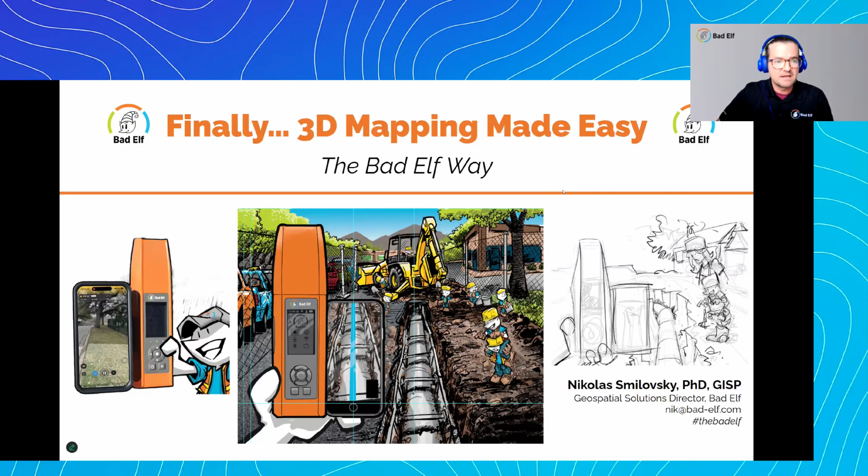So the presentation I've got today is called Finally... dot, dot, dot. 3D mapping made easy the Bad Elf way. If you've been around the geospatial gig for a while, like I have for the past 20 years, 3D mapping is not new. What we're going to be talking about today, though, is a pretty new, novel solution, one I'm pretty proud of, that really bridges the gap in so many ways. So why don't we go ahead and jump in? Before we get too much further, I do have one more set of polls.

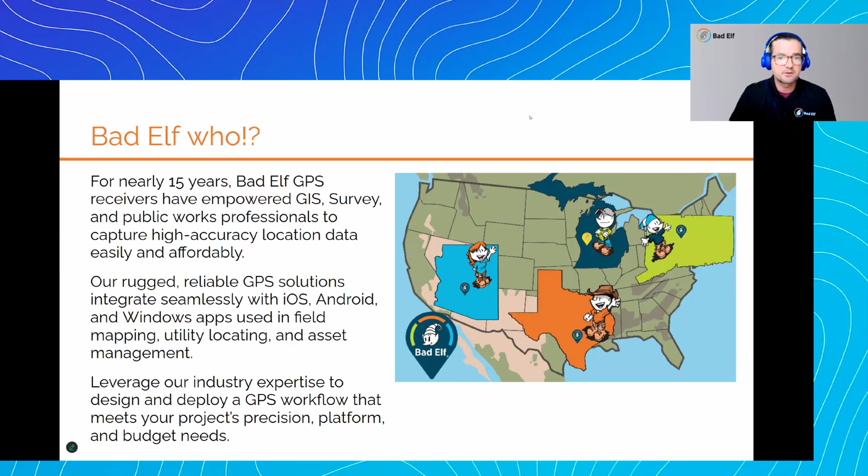So that's Bad Elf. So why does 3D mapping kind of traditionally suck?

Well, number one, it's high equipment costs. If you've ever tried to buy a laser scanner recently, or a drone or anything like that, you'll know you can spend an exorbitant amount of money, an amount that most organizations will not have a budget for. So you skip the solution because it's so expensive, or it forces you into a scenario where you're having to get a consultant to come do that work for you.

It's a really high-end technology: LiDAR, light detection and ranging, photogrammetry. These are not traditionally simple technologies, so there is a steep learning curve. It could take teams weeks, if not months, if not years, to fully integrate.

In a lot of ways, scanning in the past was slow. You would have to make these setups, and you'd kind of traverse in, hopscotching your way into your job site. That is no longer the case.

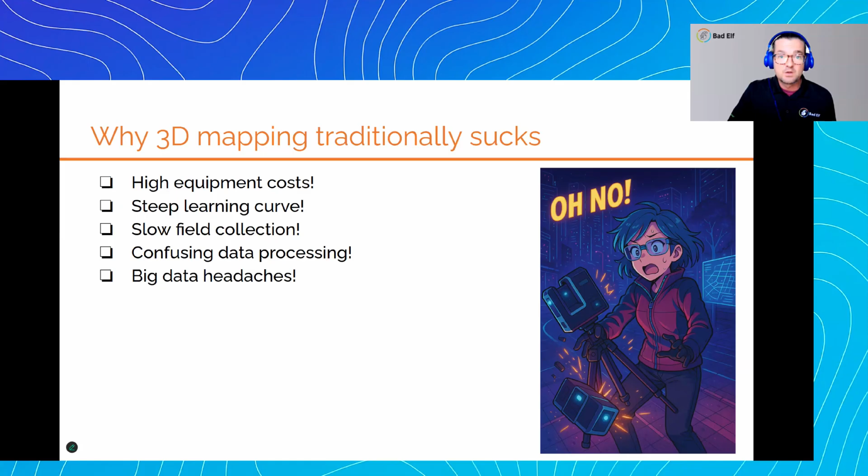Confusing data processing. If you've ever tried to process data, it could be difficult, especially when you're collecting thousands of pictures for photogrammetry, or shooting out thousands of lasers a second and creating a point cloud that's gigabytes in size. Those gigabyte-sized data sets, this big data, inherently has its own set of headaches. So that was traditionally something that could dissuade people from wanting to do 3D mapping.

And integration. How did you get that data that you just collected into your CAD or GIS system? And how do these things all line up? How do you get those dots and lines on your map to be in the right place?

Add all of those kind of traditional issues with 3D mapping, plus all the normal issues, like weather. We were just chuckling about how hot it is across the country right now. I don't know about you, but I don't like scanning in 115-degree weather with humidity.

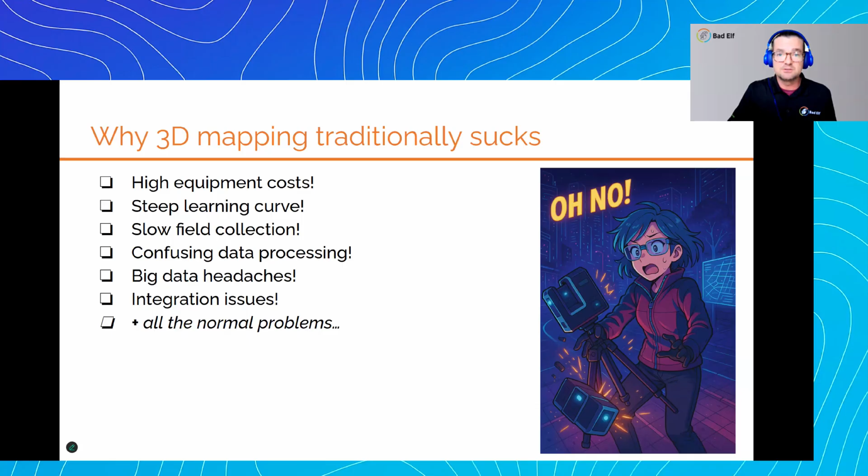So you add in all these traditional, quote unquote super professional term here, sucky aspects of 3D mapping plus normal stuff, and a lot of people would not get into the industry. I'm here, and I think you'll see through Tom and Tim's presentations, we are here to convince you that the time is now to implement a new solution.

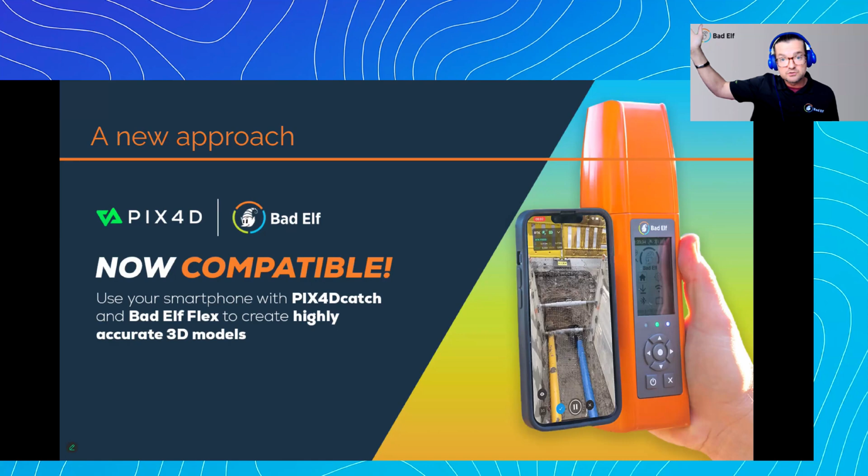That new solution is literally Pix4D and Bad Elf. Both companies have been around for quite some time. Bad Elf is an affordable, accurate, and versatile BYOD GNSS. And most of you would know that Pix4D is the world's renowned photogrammetry point cloud software for both UAV traditionally and terrestrial scanning.

The approach that you're going to see today with Pix4D Catch and Bad Elf is what we call the BYOD approach, the bring your own device. What is your own device? It's the cell phone in your pocket, the tablet in your backpack.

So with your iPhone, with LTE or cell phone connectivity, with a Bad Elf GPS, with the Bad Elf Flex, with an RTK network—that's a real-time kinematic network, a corrections network that provides high accuracy to your GPS—the Bad Elf, and that high accuracy is passed to the Pix4D Catch app on your iPhone or iPad.

So I mentioned earlier, I was going to talk quickly about POB or bust, this idea that all geospatial projects need to have a strong geodetic background. So let's talk about this.

Traditionally, in the world of surveying, there's a concept called point of beginning, or POB. This is like the rug that ties the room together. In ancient Rome, there was literally a monument in Rome, and all maps led back to that monument. That was a cornerstone or point of beginning for the entire Roman mapping architecture of the Roman world.

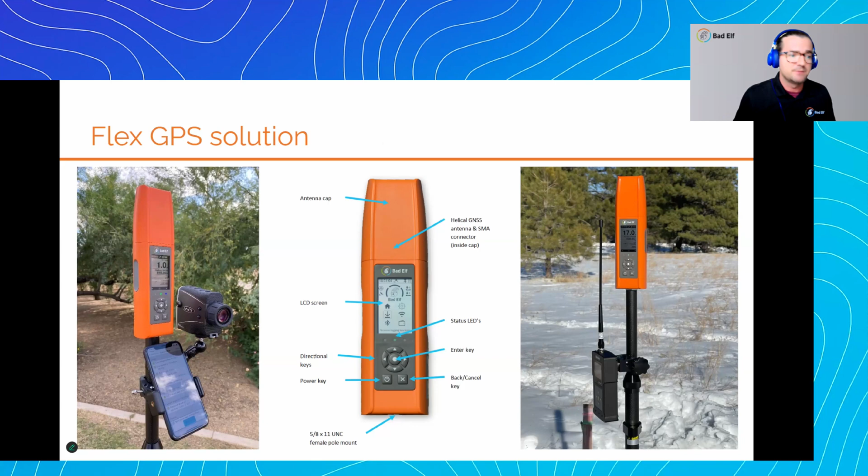We can do base and rover. You can connect peripheral devices like laser range finders, you name it. We've also got the Bad Elf Flex Mini, a smaller device, a near survey grade device. So depending on your needs, if you need something bigger, a little bit more reliable and accurate, you can go down that road, or perhaps something a little more affordable, versatile, and easy to carry.

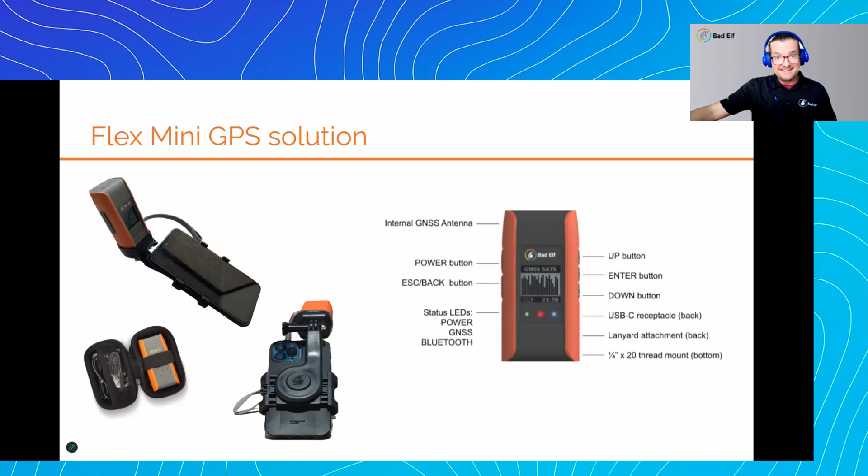Okay, so Bad Elf, as I mentioned, we create the GPS that ties the room together. Our GPS augments with the Pix4D scanning on your phone or tablet, and then we provide high accuracy.

Okay, so let's take a few minutes. I'm going to watch this video with you all now on ADA compliance. If you've ever been around GIS, Americans with Disabilities Act and ADA transition plans have been something pretty big in the state and local government space for the last 10, 15 years. So let's learn, or see at least, how Bad Elf plus Pix4D can be applied to an ADA compliance project. Here we go.

Hi everybody, thanks for joining today. I'm Chris the Bad Elf, and I'm here at UTSA in San Antonio, where I'll be conducting an ADA survey using Pix4D Catch and the Bad Elf Flex. We'll be collecting ramps, crosswalks, and other ADA assets, so stick around if you'd like to see all the tips and tricks that go into collecting a quality 3D scan.

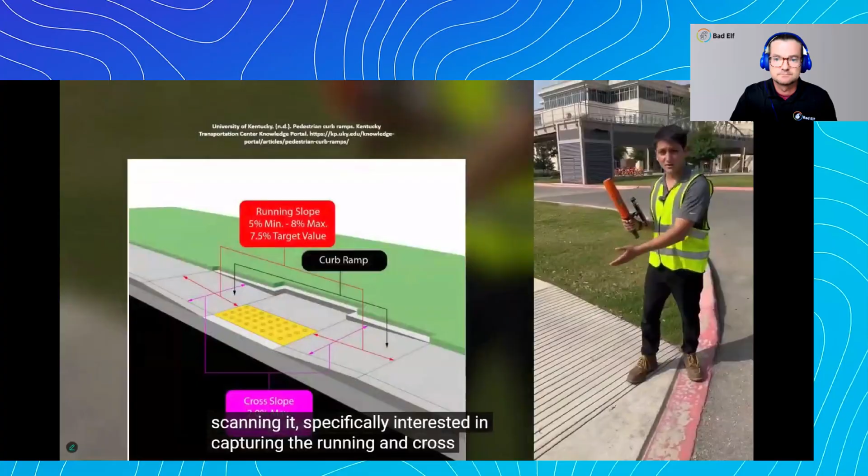We're here at one of the ADA ramps we'll be collecting today. Whenever we're scanning it, we're specifically interested in capturing the running and cross slope so that whenever we generate that point cloud and get back to the office, we can go ahead and take those slope measurements in an accurate, precise, and repeatable manner. So how do we get started using the solution?

First, you want to make sure you're paired with Bluetooth, and then you're going to open up the Pix4D Catch application and engage RTK correction. So to do that, I'm going to go here to the top left, click these little three dots, and hit RTK via Bluetooth. From there, it's going to recognize the Flex, it's going to recognize my GeoNet credentials, and then I'll go ahead and hit connect.

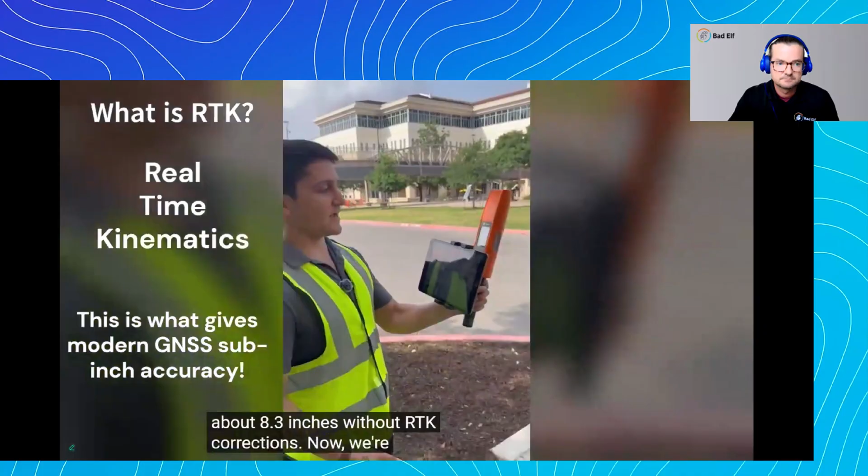So right now we're at about 8.3 inches without RTK corrections. Now we're engaging it, and if you see there, I'm actually getting 0.8 inches of GPS accuracy for my scan. And now I'm going to go ahead and walk this ramp, crosswalk, and other ramp.

And I think that wraps up our final scan. So assuming we got everything, let's go ahead and pack up, get to the office, and see how the data came out. We're back in the office, and it's time to start analyzing the point clouds that we created while doing our 3D scans of the ADA ramps at UTSA.

To get started with putting this point cloud to work for us inside of GIS, we'll begin by adding annotations. If I click my line, you'll see that I can create cross slope measurements and running slope measurements with a couple clicks of the mouse. From there, I can generate elevation profiles, signify my slope as a percentage, and export to GIS in the form of a shapefile or CAD as a non-proprietary DXF.

All right everybody, we're in ArcGIS Pro now, and the first thing we're going to do is bring in the shapefiles that we exported from Pix4D Cloud. To do that, I'm going to add a folder connection by right-clicking on Folders within the catalog pane. From there, I'm going to navigate to the folder that has my data. Hit OK. Now that I have that folder connection, go ahead and open it up. Select my layer, which is UTSA ramp slopes. Right click it, hit add to new, and create a new map.

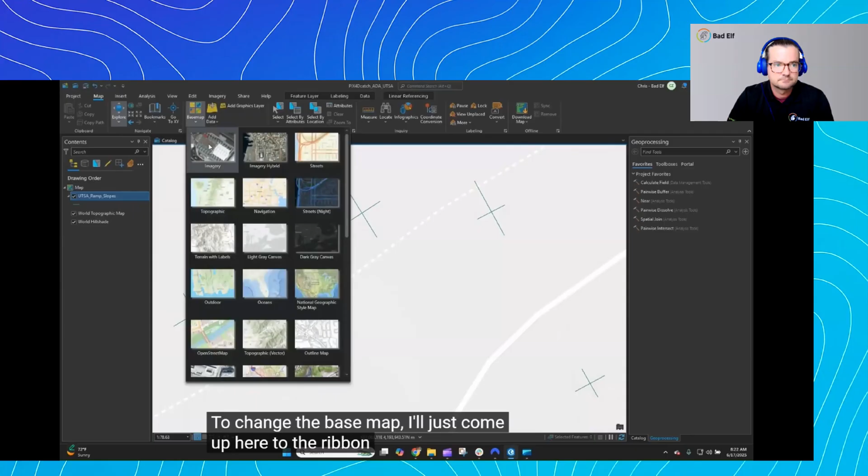Now this is going to come in the default base map, so we're going to go ahead and change it to an imagery hybrid to give us the most situational awareness of the campus. To change the base map, I'll just come up here to the ribbon and change my base map to imagery.

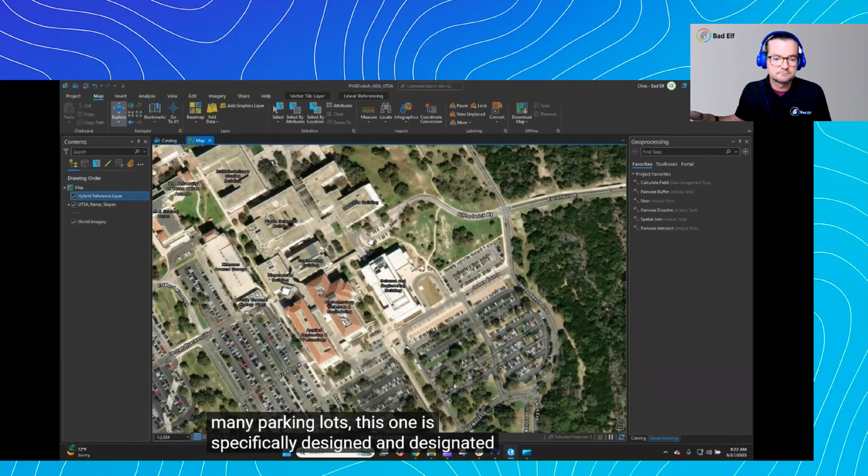One thing we can note right away is that we collected this data in a very special location. If we look closely, we can tell that while UTSA has many parking lots, this one is specifically designed and designated for ADA access to the campus.

To ensure ADA compliance for these ramps, we'll need to take a look at the slope of each line. The quickest way to do this with a data set this small is just to look through the attribute table. Here we'll see that each of our lines has a slope associated with it. For running slope, we're looking for values under 8%, and for cross slope, we're looking for values under 2%.

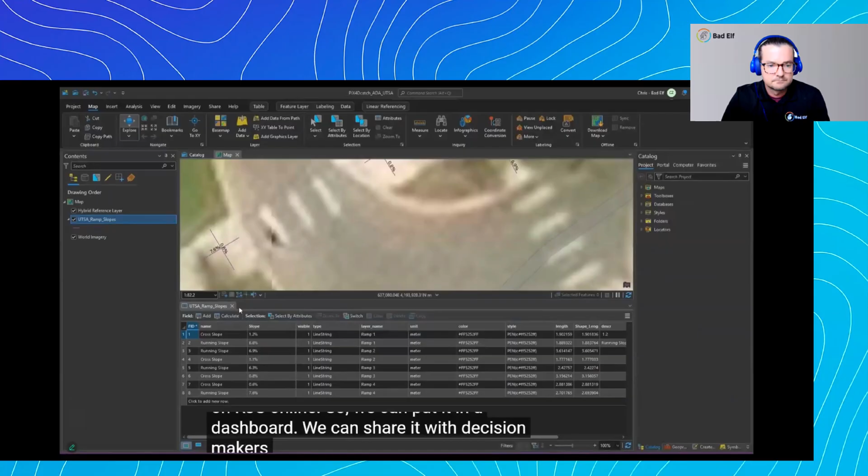So we verified that everything is in compliance, and now we can share the data on ArcGIS Online, so we can put it in a dashboard, share it with decision makers or other departments. First, I'm going to right-click the feature layer, go to sharing, and share as a web layer. This pipes it directly into ArcGIS Online in my organization's geodatabase. Now we just hit Analyze, then Publish, and share as a web layer. Now anyone within the organization can view this data and make actionable insights.

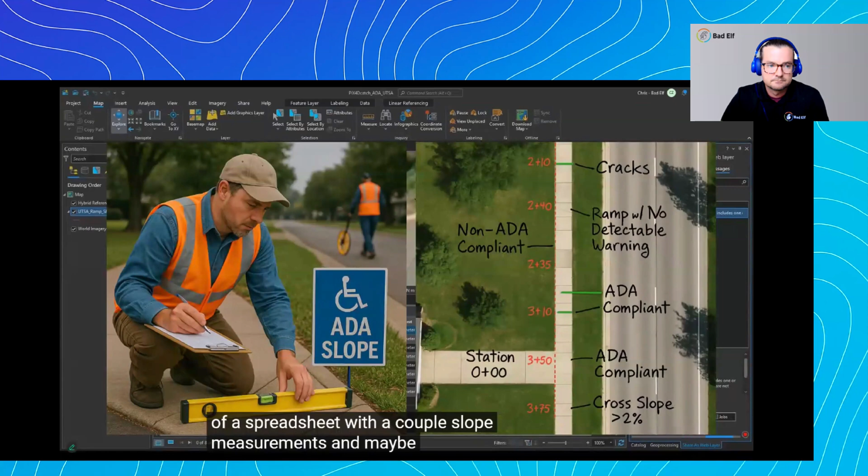If you've done ADA compliance work for a while, you're probably familiar with the typical process. Oftentimes, this data comes in the form of a spreadsheet with a couple slope measurements and maybe some coordinates, or other times it's only a marked up aerial photo with stationing. Converting that into reliable GIS data takes time, and the accuracy is not always guaranteed.

For this project at UTSA, we used Pix4D Catch and the Bad Elf Flex to capture geo-referenced 3D data right in the field. It's accurate, tied to the state plane coordinate system we chose, and it's ready to publish in ArcGIS Online with minimal post-processing. At the end of the day, it's just a faster and more reliable way to document and share these ADA site conditions. That concludes today's video on how Pix4D Catch and the Bad Elf Flex are used.

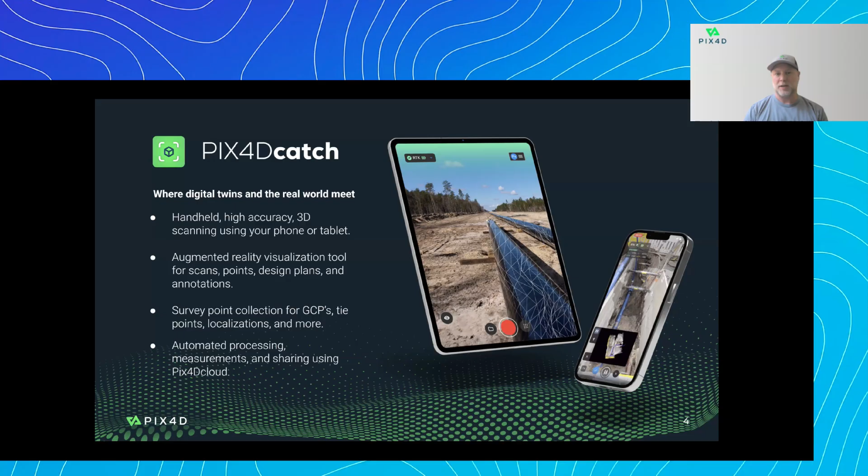So like I said, Pix4D Catch is the mobile app. That's the data capture portion of the app. We have our Pix4D Cloud, which is our cloud processing and analysis and sharing tool, and Pix4D Matic, which is our desktop processing and analysis tool as well.

One thing I wanted to mention here: Nick showed that ADA video, and he was showing the lines and the measurements in ArcGIS, which is really cool. But through our software, we can process the data, we can analyze the data, but we can also export all that data into whatever generic format you're looking for, whether it's going to CAD or GIS.

So in ArcGIS, we can export the mesh models as SLPK, scene layer packages, and those are drag and drop of a 3D mesh directly into ArcGIS, into an ArcGIS scene. So it's a really cool way to be able to visualize some of this data in ArcGIS.

So let's talk about the technology here a little bit. We're using a technology called photogrammetry. This is nothing new, it's been around for a very long time. It's the science of taking accurate measurements from physical objects from photos. So take photos and measure from those photos.

This technology dates all the way back to Da Vinci. He was one of the first people to theorize that this was possible and to start to work it out. Practical techniques were developed by French scientists and geodesists in the 1830s, so we're going back 200 years now. As surveyors, we started using it in the 1910s with the USGS aerial surveys. It was used heavily in World War I.

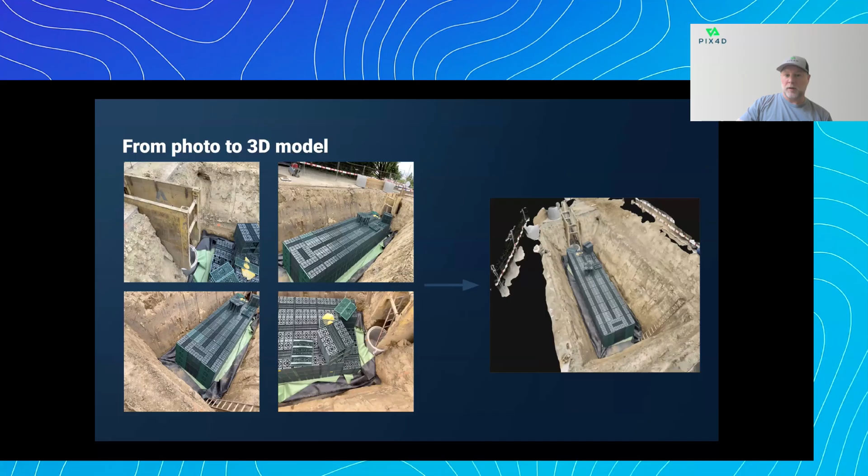So photogrammetry works with just about any type of camera. As long as we know the parameters of that camera, such as the focal length and the sensor sizes and things like that, we can turn pixels into points.

But now we have these cameras in our pockets every day. We're all walking around with these cameras, and they're really good cameras. I really want to stress that, these cameras are really high quality. 8, 12 megapixel cameras, and of course they can go higher than that, but Apple limits us a little bit on that, and you don't really want a 65 meg photo to be processing either. But these cameras are really good.

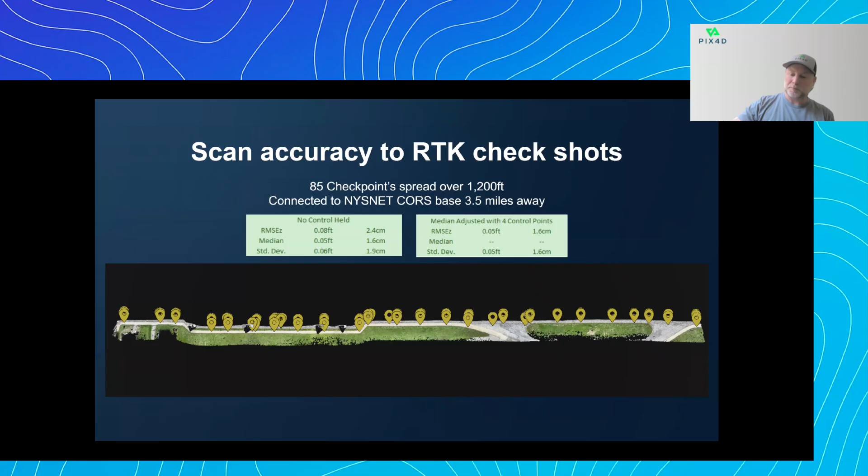And I get challenged a lot. I think this is pretty amazing, again, from a cell phone. I get challenged a fair amount on why the vertical accuracy is better than the horizontal accuracy, because in standard GNSS, GPS work, it's usually flip-flopped the other way. Horizontal is a little bit more accurate than the vertical.

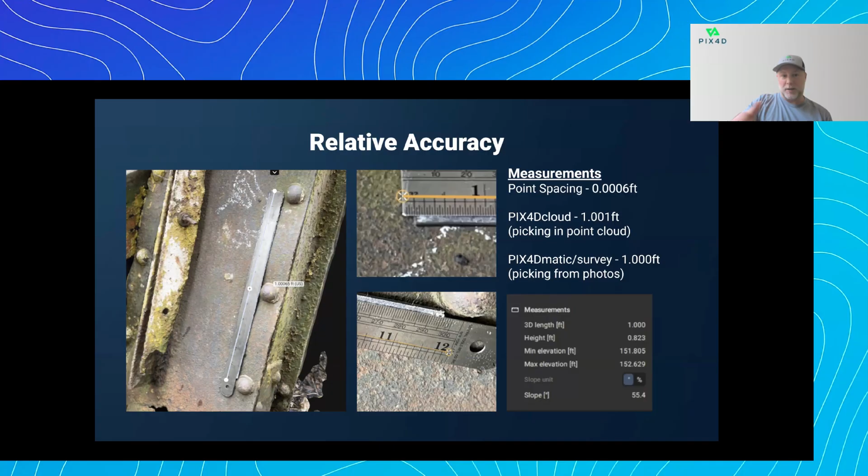These are just show-off slides here. These are actually mesh models from that scan, not photographs. You can measure rust flakes in millimeters on these if you wanted.

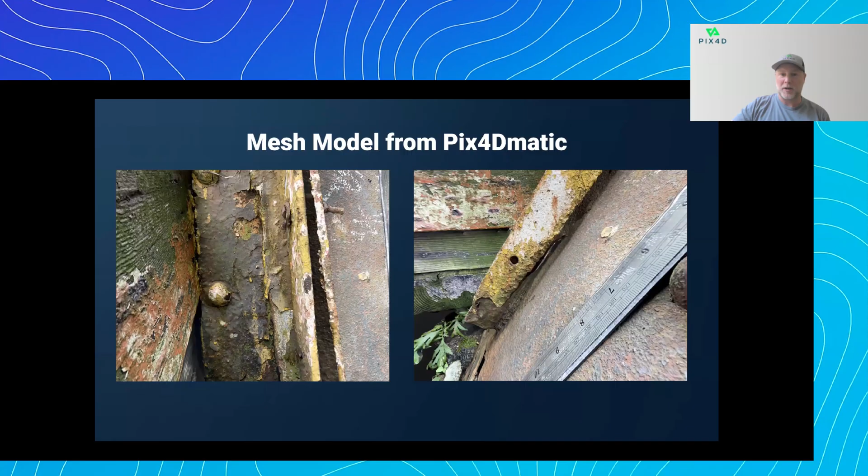Just another quick relative accuracy one here of some anchor bolts. And again, another, but these are mesh models. You can see the grain in that wood. You can count the threads on those bolts if you want. In fact, we actually did some of that with Tim on some gas valves when we were doing some demonstrations with him maybe a year or so ago, which worked out pretty well.

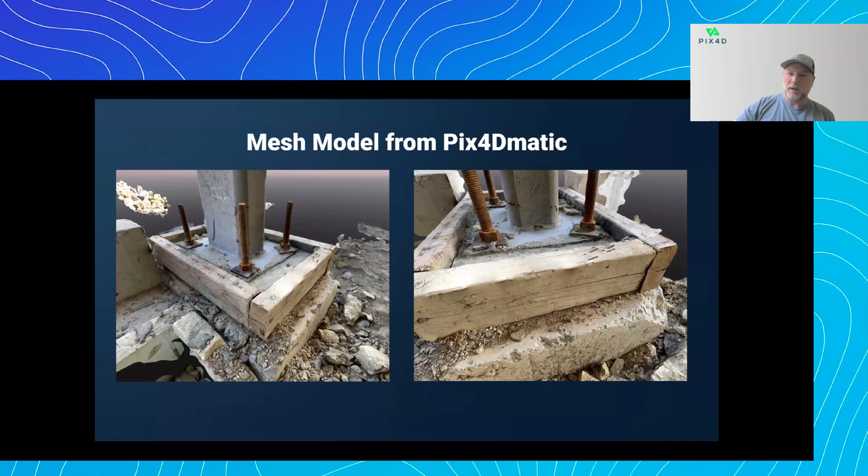Augmented reality accuracy. So over on the right, I have a rebar, some property corners I found out there. There's some challenges to measuring the accuracy of augmented reality. One, it's constantly updating as you're moving around, so it does move around a little bit. It's a virtual visual representation on the screen that you're looking at, so there's some interpretation open to it.

It does improve over time. Objects closer are more accurate than objects further away. And traditional GNSS, RTK things, doesn't work under bridges, right? Let's factor in on this.

So I did an experiment. I went out, I made these targets with rings on them, at 1/10 intervals. Did some RTK observations on those, loaded them into Pix4D Catch, and then went out and viewed those in augmented reality to see how close they got. Here we go, let's see if the video plays.

So my observations on this are that all the targets I tested got within 0.2 of a foot, about 6 centimeters, within seconds of arriving on the point. They got a little bit better when I stayed on that point and watched it for a while, got down to that 10th range or 15 hundredths range. Once it was locked, it usually stayed as long as I kept walking around it and looking at it. It stayed pretty tight, but I did find a couple little outliers here and there.

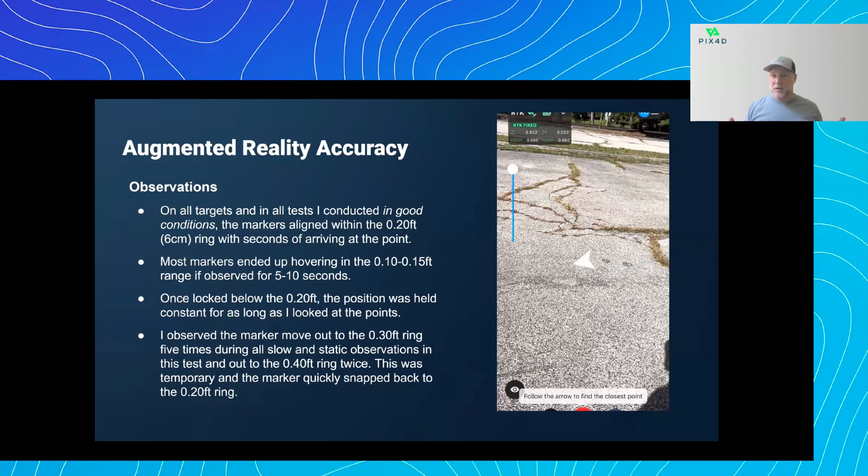So in general, when people say, what's the accuracy of the augmented reality these days, I say anywhere between 5 and 10 centimeters is generally what I'm finding as far as accuracy goes. But you can see it snaps right in there as you get close to those in the augmented reality.

This was just one more fun one. I was up on a local mountain here in New York, and I knew there were some property corners out there because I'd surveyed it. So I entered those coordinates in and went out there in the woods.

I was underneath trees, did not have good GNSS by any sense of the word. I was in RTK float this whole time, and I was still able to get within about a foot of that pin out there in the middle of the woods on the side of a mountain, which I was pretty happy with. It's good for recon and things like that—think about finding water valves off the side of the road or things like that out there.

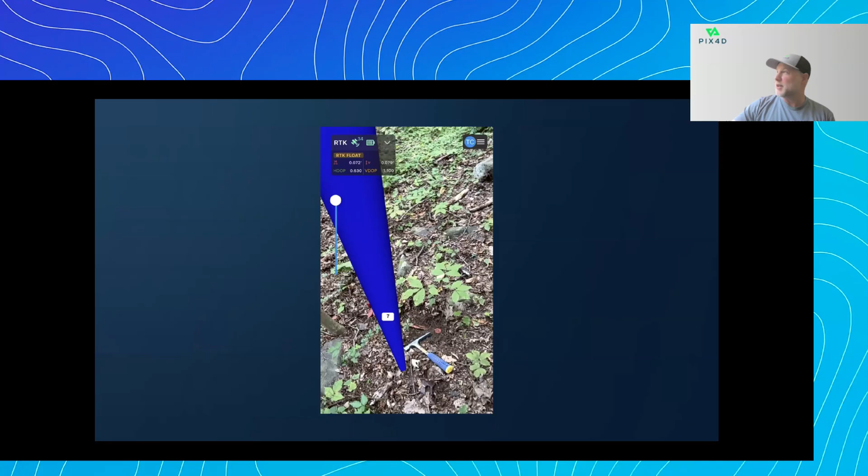So where does all this stuff hit the road? How do you actually use all this? It's really cool technology, but how do you use it in the real world out here?

On the right here, we have what I love to call these spaghetti trenches. We're near New York City, it's nuts down there - I'm sure Tim will show or talk about some of that. Trying to locate this traditionally with GNSS or total station is going to take a very long time, and it's really prone to error. There's a lot going on here, and you have to shoot this exactly right to get it to come in properly. You can scan this in 3 minutes walking around, and you have a real visual model representation of all these utilities that you can then utilize. It really reduces the amount of error in utility locating and mapping.

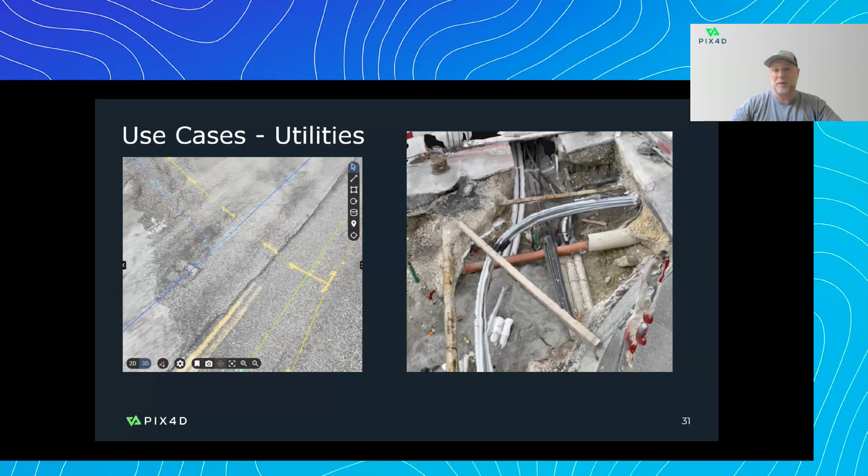This augmented reality stuff here - I went out and scanned this the day before they did the saw cut, then the day they did the saw cut, and then the day they did the excavation. So you can see the saw cut, the markouts, and the actual excavation there, with the excavator and building inspector hanging around in the back. We're right on top of those things, so you can visualize anything you've scanned previously in the ground.

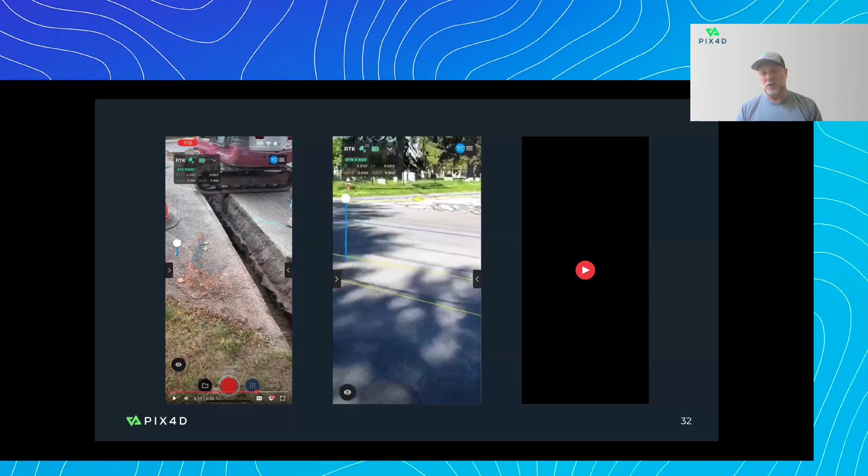Right here are some utility markouts - I scanned these almost 3 years ago. Apologies for the potato quality of this video, but I scanned these utilities about 3 years ago. Right now we're looking at the scan of those. I'm going to turn that scan off and leave just the lines. Now we're looking at an area that's all been paved over - there's no markouts there anymore. But we're looking at those utility lines exactly where they were on the ground at the time I did that scan 3 years ago.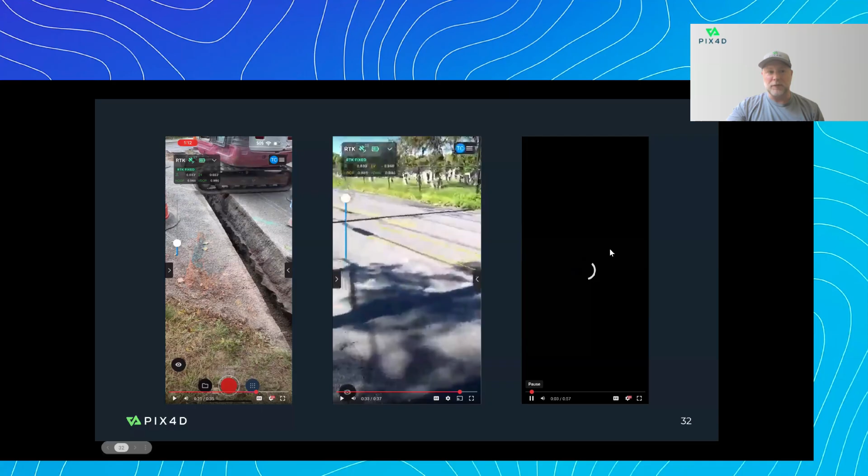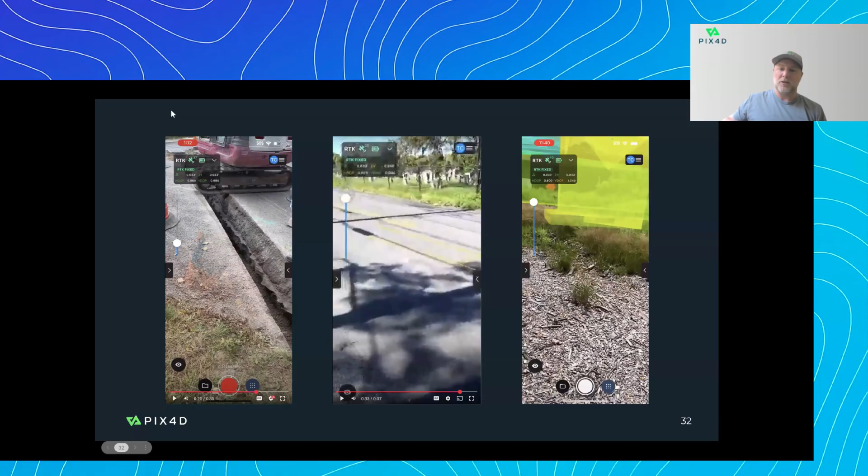This one here is a bit of a different use case. This is out in Connecticut with Connecticut DOT, and we took an IFC model of their bridge design. This came from Open Bridge Designer from Bentley, and we put that into augmented reality so they could come out and see where the new abutments are going to be. You can see where the footings are, you can see the girders - you can see everything you need to out there on this one.

Construction inspection is another huge use case - pay items, volumes. We can do volumes in the field on these, so you can just scan a pile in a field, hit compute, and it'll tell you the volume of that pile. So you can check your dump trucks, check the tickets, make sure they're coming in right. Pay items on the walls, as-built for utilities or footings or anything about to be buried - put this stuff in the hands of the construction inspector out there. We're working with multiple DOTs across the country right now who are using this system quite heavily.

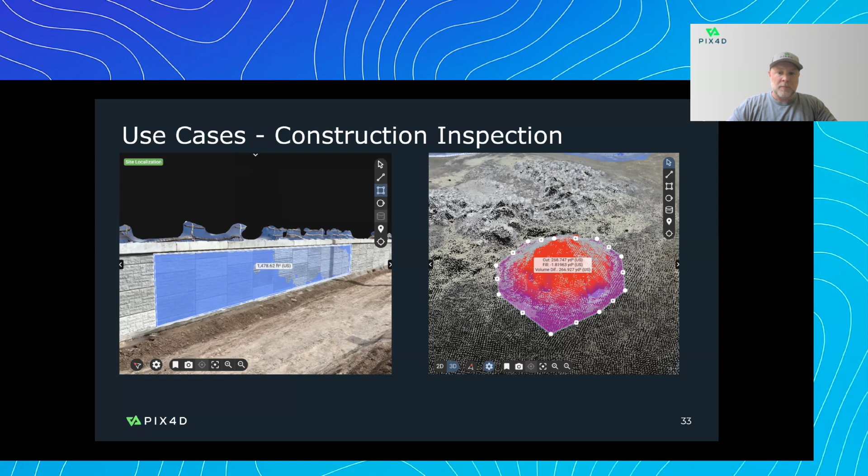And then more general inspection - I showed that bridge model, we can measure the rust flakes on that. On the right-hand side we have a 'Frankenstein column' as they called it, which was a bad concrete pour. We were able to scan this, draft out where all the rebar was in it, and then they were able to design new hooks into that rebar so they could repair this structure.

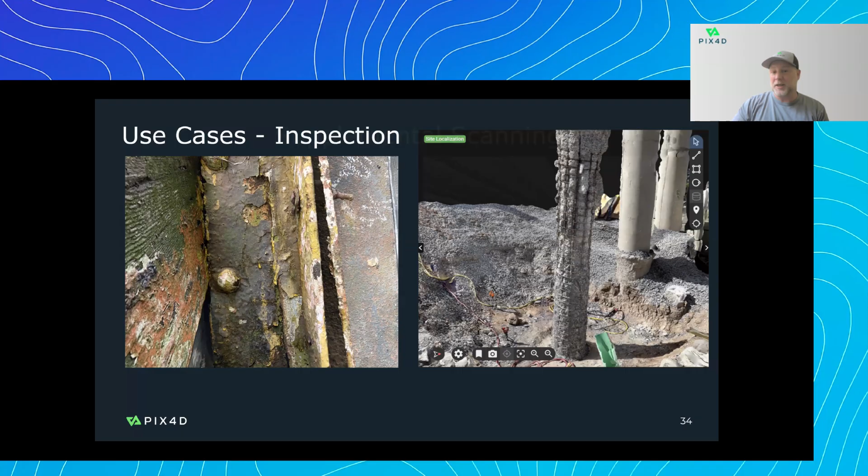And then supplemental scanning. If you're using drones already, they can't get underneath bridges, they can't get underneath eaves. Here on the right, we use some stuff. This is for Massachusetts DOT, where they had a great scan of this whole area. And then we went in with Pix4D Catch, and we're able to get underneath those bridges and add those piers and abutments in.

So that about does it for me on here. I hope these use cases, I hope the technology made some sense to you guys. I always feel it's a little bit important - maybe it's just because I'm a surveyor - but I like to understand and have some sense of the technology I'm using. Don't want it to just be black box voodoo out there. Yeah, it's this accurate, prove it, right? And that's what we do here at Pix4D - we focus on accuracy and we focus on quality.

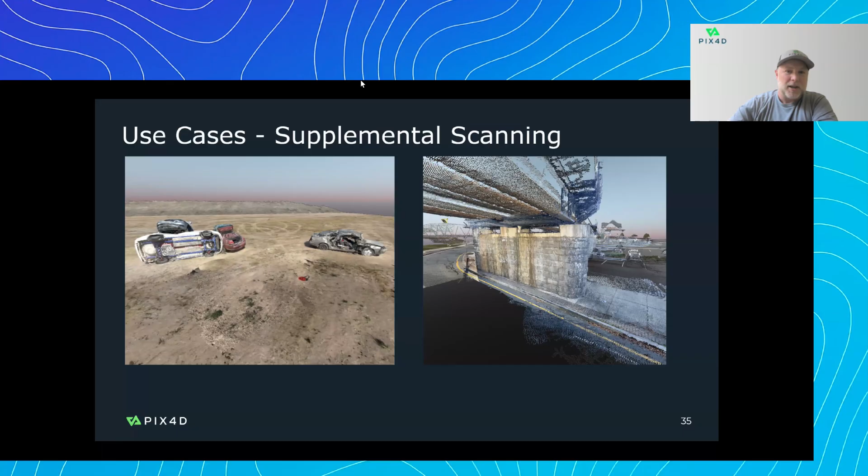Thank you very much, Tom. I appreciate that. And as Tom mentioned, I got invited to speak today because I'm a guy who's got a lot of problems. Thankfully, as a land surveyor, most of those problems are spatial. But like a lot of you, we have to deal with old records, new records, things getting done today, things that were supposed to be done tomorrow. A lot of that information and a lot of that data - well, what do we do with it? So what we'll share today is taking a little bit of what both Nick and Tom spoke about and really showing you how we've taken that and actually made use of it.

So let's bring up what I have here. We'll share my presentation, going to be named Reimagining Survey As-Builts. So you're going to hear a little bit about what I do. I work at National Grid in the downstate region, covering most of Long Island and New York City. As the land surveyor, we're covering the gas installation, construction, and design process from end to end.

We're there with every team along the way. And one of those things that we do is collect our information as the pipes go in the ground. And as a surveyor, we said, hey, we have a lot of information - what can we do better with it? So you're going to learn a little bit about what I do, and then a little bit about how that may be able to be reflected in what you do.

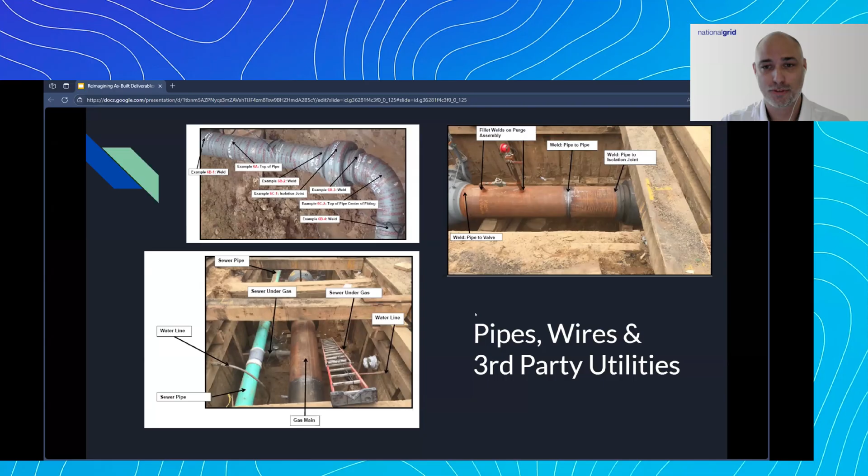Right now, we're locating those things conventionally with a total station and a surveyor on site. So as these projects are happening, we have every day a surveyor on site locating all of the information that's being installed that day. And as you can see, there's a lot here - like we mentioned, we have gas main, we have our stuff, and then we have other stuff, sewer mains, water mains, and the like. So when we take all that information, our traditional deliverable looks a little something like this.

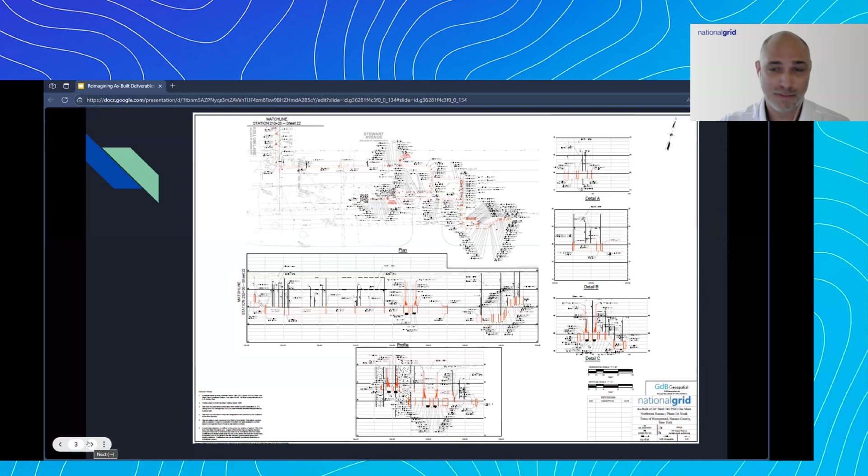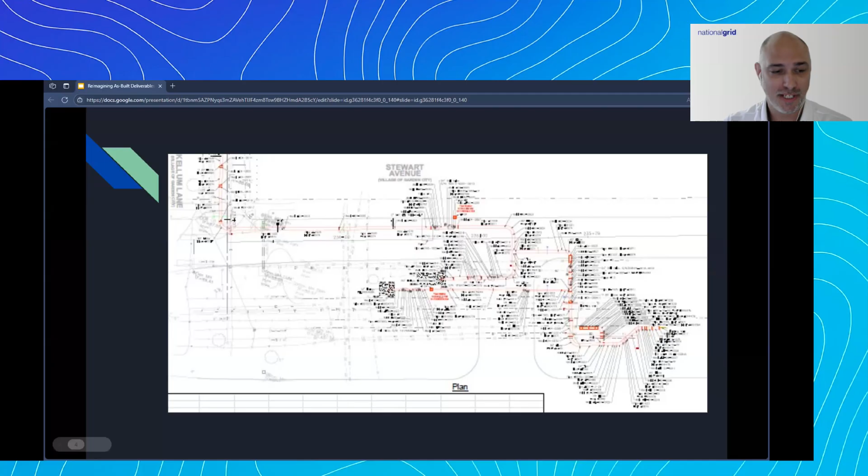Now, I don't care how long you've been engineering or what you've been up to - if you're looking at this, it's real hard to understand, it's real hard to see. There's a lot of information and none of it intuitively makes sense. And I'll even give you a zoomed in version of it, which is a little blurry, but it still doesn't make a whole lot of sense if you're looking at this. And what you're seeing on the screen is all the information we're capturing.

All that information, if you see the call-out boxes in the lower right, ties back to an entire spreadsheet full of other information. And this is just what we're collecting as surveyors. There's fittings, pipes, welds — we need to know where every one of those are, along with other information. Other teams alongside us are collecting information on these pipes and welds, and right now we're creating PDFs and handing them off to folks.

So there has to be a better way, right? How do we add value to something we're already doing? We're out there every day spending our sweat, time, and hours to locate all of this information. We said we need a better system, so we set out to create a GIS.

GIS wasn't created just to show where things were, but to allow people to make decisions quickly. That's it. So you'll notice this GIS doesn't look exactly like what everybody else has. A traditional GIS is going to be a lot of points and dots with not a lot of context behind it.

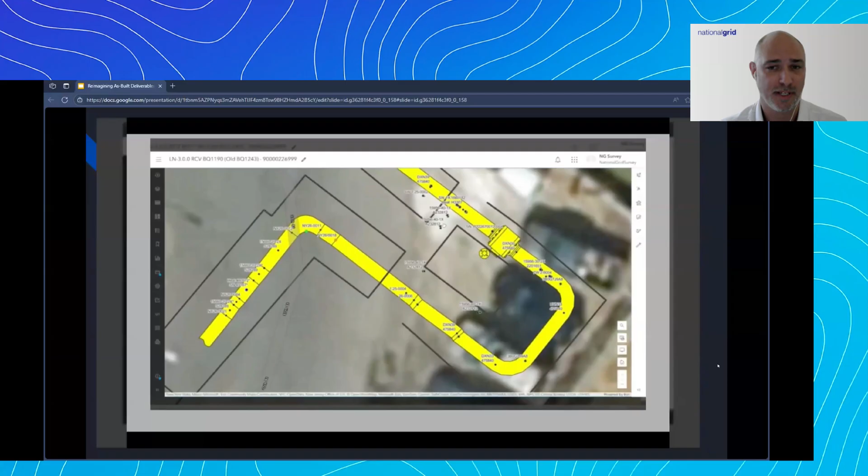One key feature in our development was ensuring we had the geometry of the pipe underlaid behind the GIS, behind the points and lines, so folks could quickly zoom to what they're looking for — find that valve, find that purge. It's similar to looking for a bus stop, a valve, or a manhole cover — we all need to find that information. Now all that information, plus what's in the spreadsheets, is located right here and searchable.

We now have all that information available to us in real time.

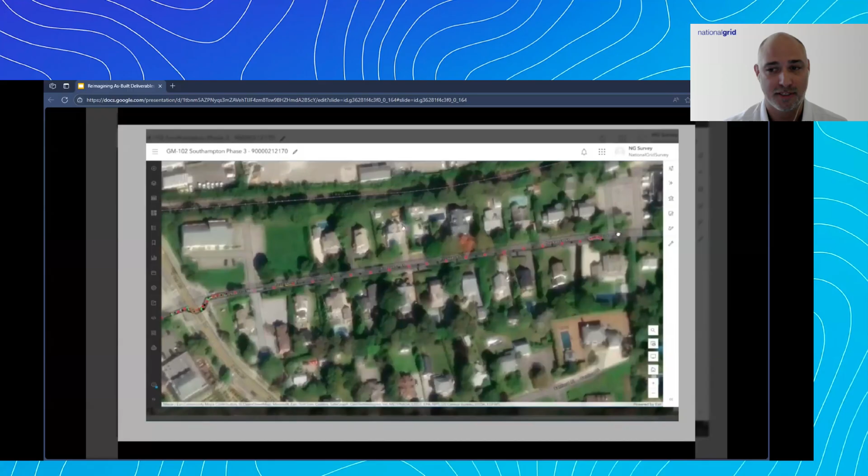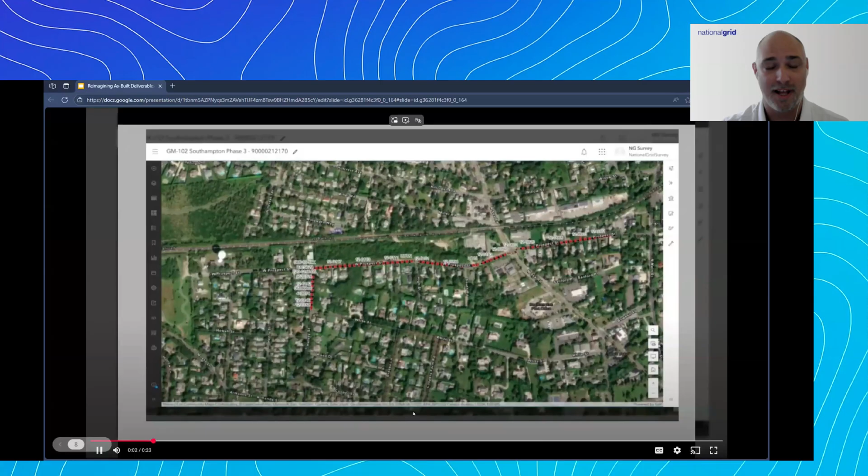One thing we speak about — I have colleagues from asset management on, and I can't be happier for them to be here because they really pushed development for this. What you're seeing is a project we did some time back, where because we as surveyors had our standards in place, we were able to take older projects and bring them into this same system, so that, as our asset management team calls it, we're creating a visual digital file cabinet.

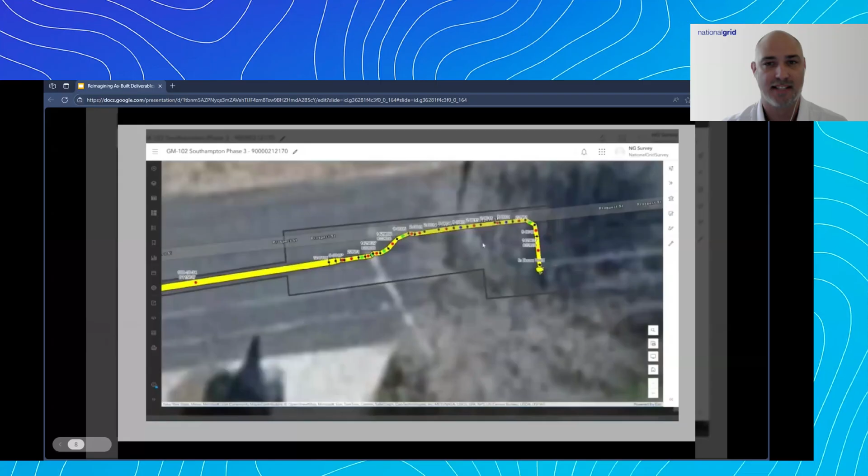Teams have paperwork and binders full of information for all of these dots on the screen. But how do you find it? If you don't have that file, the folder number, the photo number, and the actual report — all with corresponding file names — how are you ever going to find that information? This is how we start to add value: we've collected this spatially, so let's start storing some of these things here.

So now we have this — we've created somewhere to store the conventional stuff. This is where it starts to get exciting, because up until this point we're making digital what we've already done before, for years and years. As-built surveying is pretty much the same, but now we're representing it differently.

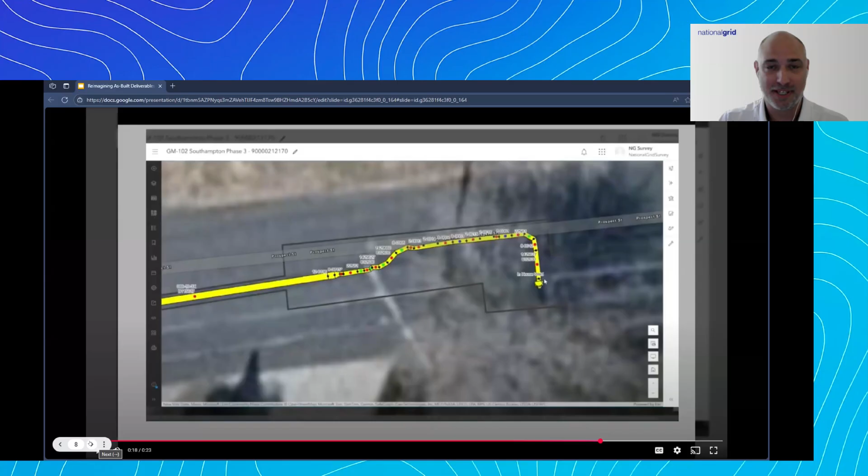Now we've added value for our project managers and engineers, giving them the ability to see this stuff visually and digitally. But the world's changing, as you saw at the beginning of this presentation. We're also utilizing the same information and getting out to sites using Pix4D, as Tom mentioned earlier. Early success was — can we get out there and visualize a site so our engineering team can understand what we're looking at? Right off the bat, we see it here on the screen.

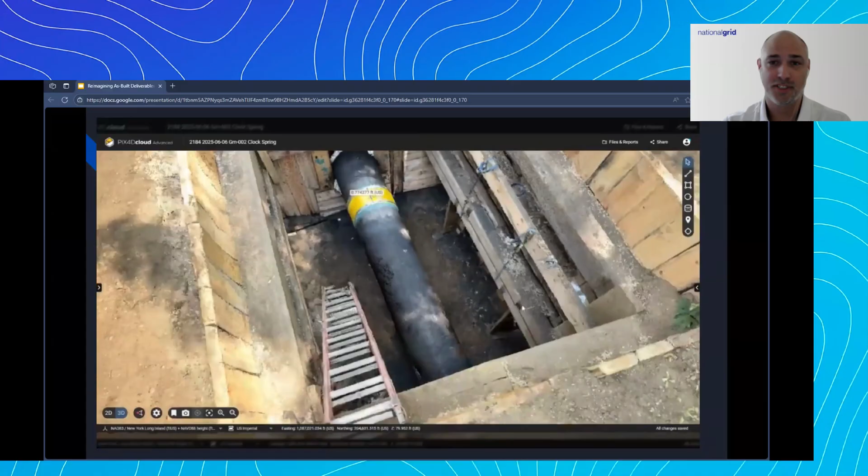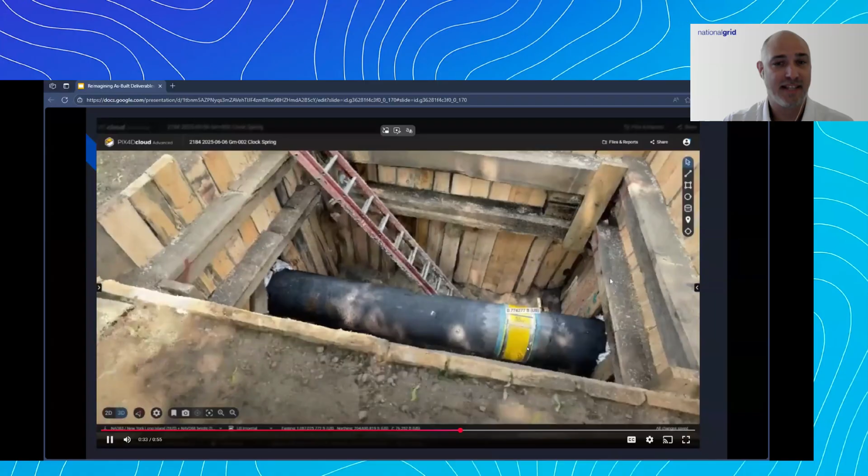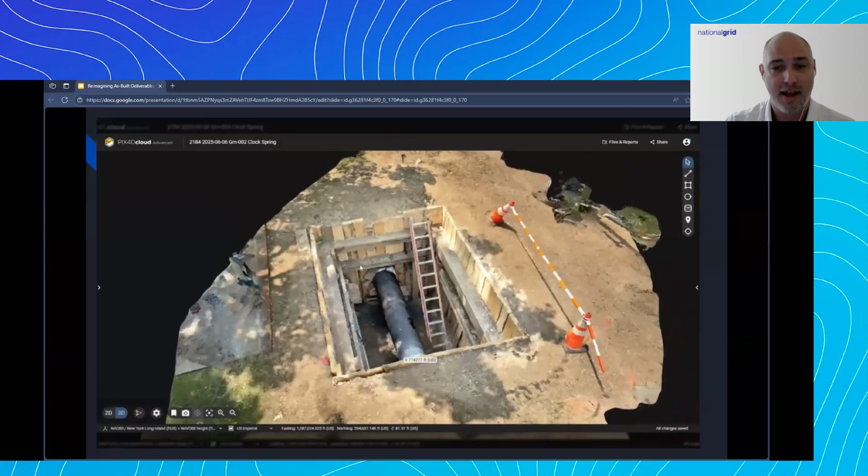The ability to view a job site from your desktop is a game changer. Having folks make decisions based on what they saw from someone scanning has become a huge benefit for conversations on our team. The ability to scroll through a 3D image while having a conversation with an engineering team has become invaluable. And I say invaluable, but I'll show you real value.

We mentioned we locate all of that piping, and all of that piping has lettering on it — its own serial numbers and different information, and that's all information we still have to track, right? Well, what happens if we don't track it correctly?

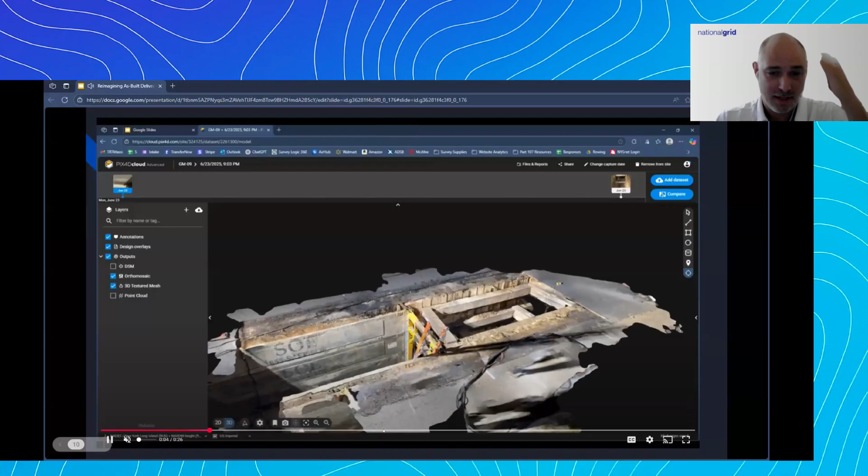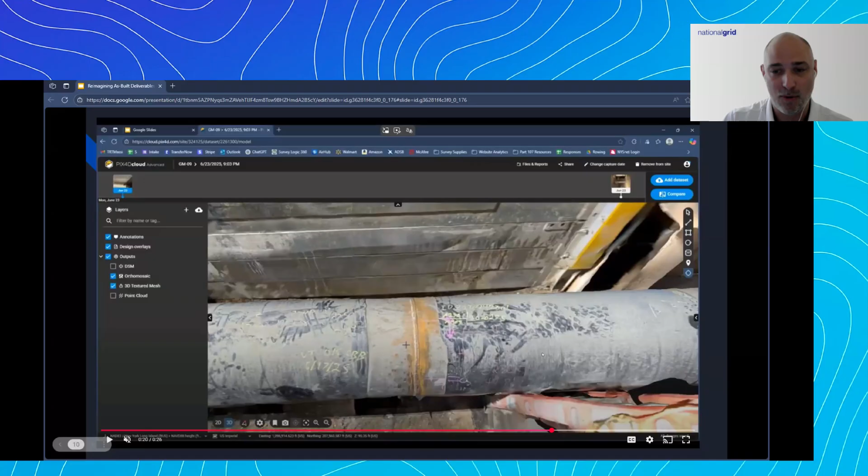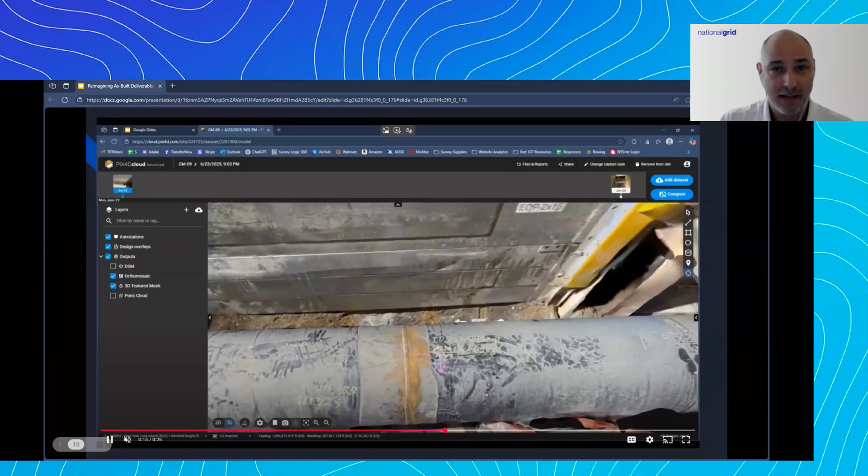The information we're collecting now is saving us money. We have these units and we need that information for our spreadsheets that perpetuate. If we don't have that information, we have to redig that hole. But now we have the ability to go into these sites after the fact, after we've come back and created a drawing, and we're not really sure if the clerical error was on the weld inspector, the surveyor, or the note taker. Now we have the ability to actually jump into these projects and see where those changes have happened.

So the cost of technology for these units—we've seen the ability for these units to pay for themselves by avoiding one mistake. The ability to allow us to not make one dig pays for a unit for a full year for us. And that's one of those big pieces for a Pix4D side.

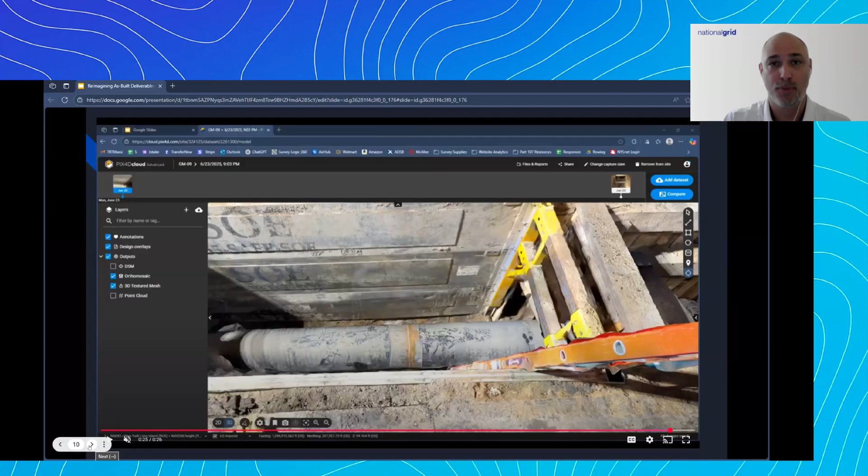Now we talk about some of the other use cases, and Tom mentioned utility markout. As a gas utility, we do a ton of it, and I need to know where things are when I'm putting things in the ground. One of the things we also do is utilize our drones.

What you'll see on the next clip here is actually one of our power stations. Recently we needed to get some utility information, so we flew a portion of this site with our drone and ran it through our Pix4D. You'll actually see here, this is the ortho mosaic that was created. It's a little faint in the coloring, but you can see the utility markout sitting in here.

As we pop into the 3D model, tying into what Tom was speaking about with both the relative and absolute accuracy, we've seen very similar results. This allows us to go in and fly our site to get the full picture. We come in and we're able to see this thing in 3D, we have the full picture.

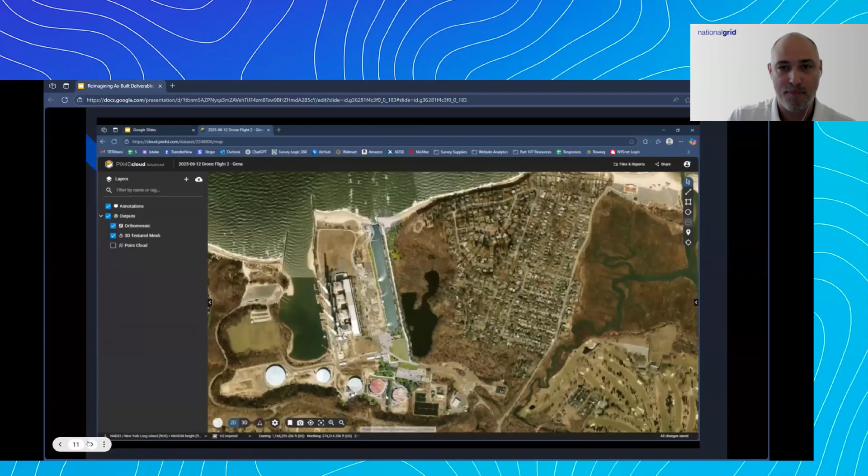We know what it looks like today. But the real value comes in when we're able to go back out on site and not send a survey crew to go and locate that very same markout when it gets updated. What you're seeing here is a bit of that 3D model of updated utility markout on that exact same site. As we back out, you'll notice it's that same intersection we just looked at.

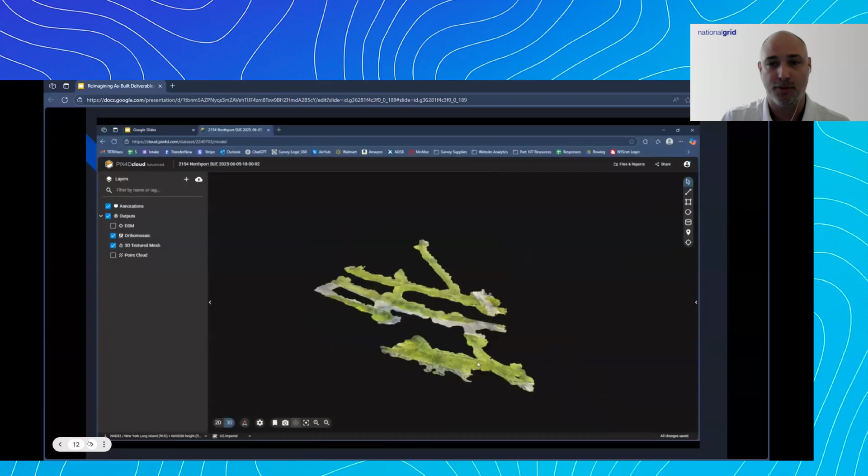So really the versatility and the ability to change the way that we are collecting data, and the different means and methods, has allowed us the ability to capture more of that geospatial data that we just weren't doing before. And now we have the ability to actually do something with it. I think that's the biggest piece here for everyone to take away: what is it that we are actually doing with our data?

Because we were surveyors, we weren't GIS professionals, we weren't a whole number of things. We're surveyors who just said, we have beautiful data—how do we make it available to more folks? That's the world we're living in today with GIS. The big piece to think about with your data, with what you're doing out there today, and the ability to acquire that data, is how can you make it more retrievable, more accessible, and really simplify it. That's really my message for today.